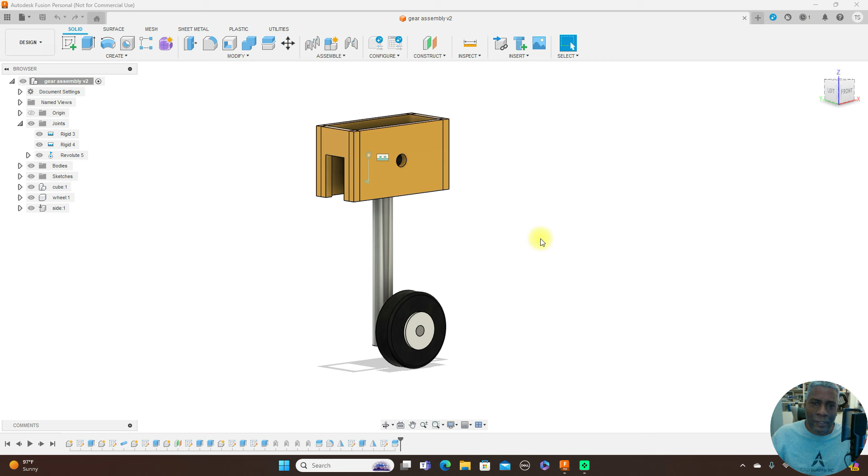Hello everyone and welcome back to the channel. Today we're going to be looking at doing a simple assembly like this landing gear here.

And then giving it motion also like this, you see it moving all in there.

Okay, let's go ahead and get started. Let me start a new project here. So I have a blank screen here. So the first thing you want to do, now this here, I'm going to do this in millimeter units, as you can see. So click this and this.

Then we come over here to assembly, and this is going to be a new component. I'm going to call this the cube. Click OK.

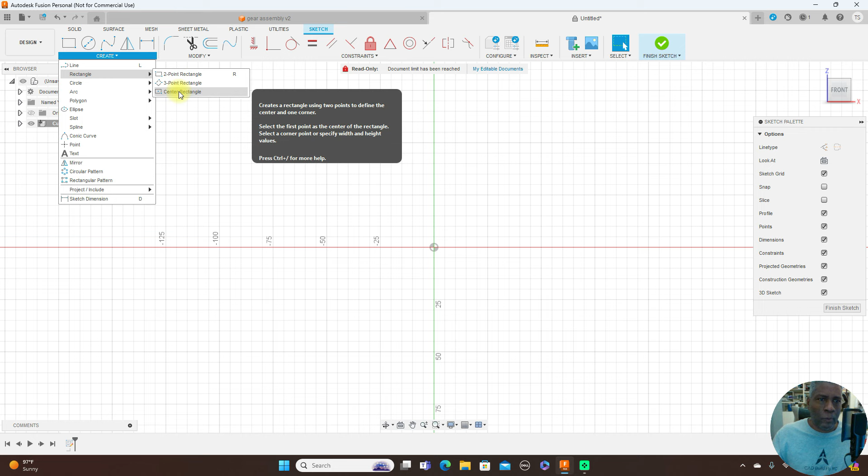Now create a sketch on front plane. Use a center point rectangle. Center here, and type in 40. Then hit Tab, and type in 40 again. And hit Enter.

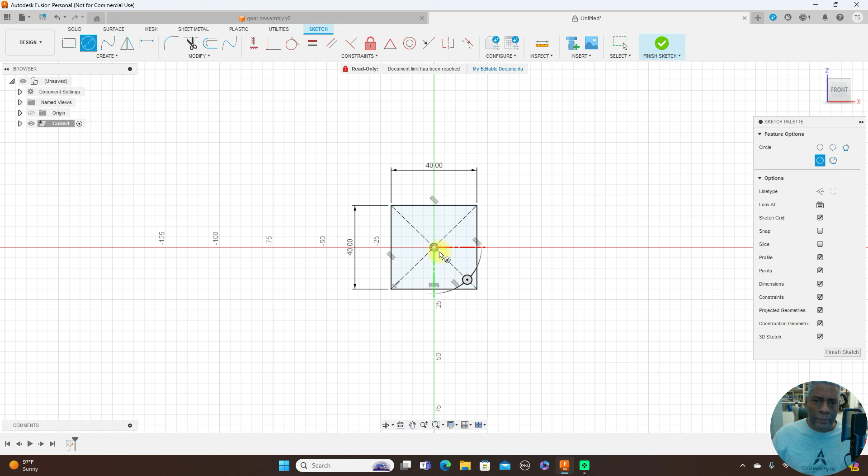Now use a center diameter circle. Center here, and change this to 8 millimeters. Click OK. Go ahead and finish sketch.

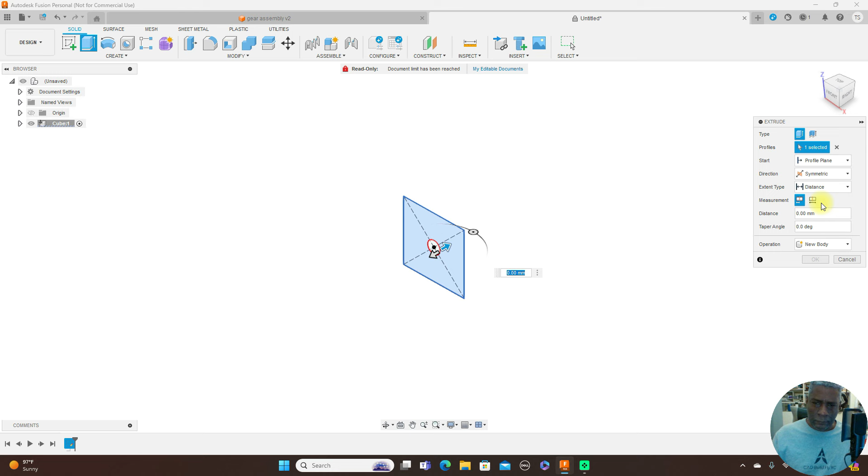Now we're going to extrude, letter E. Select this and change this one side to symmetric and type in 15. Click OK.

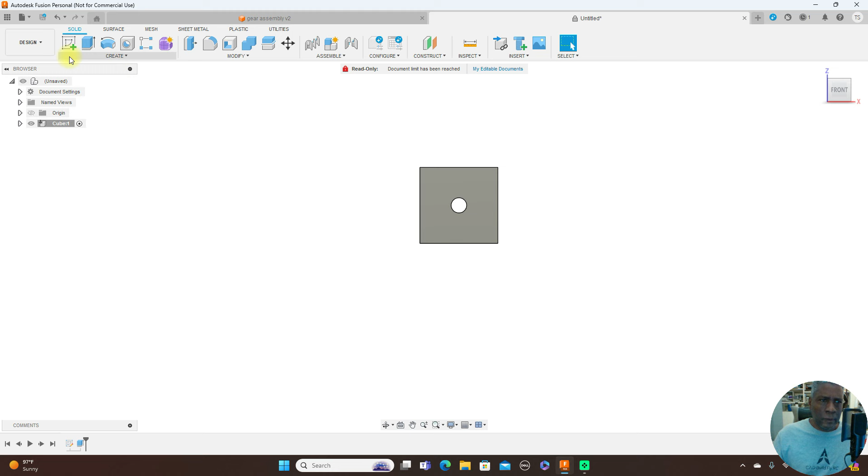And this is the first component, the cube. Now we're going to do that landing gear shaft. So come over here and save, click this. Then assembly, a new component, and we call this the shaft. Click OK.

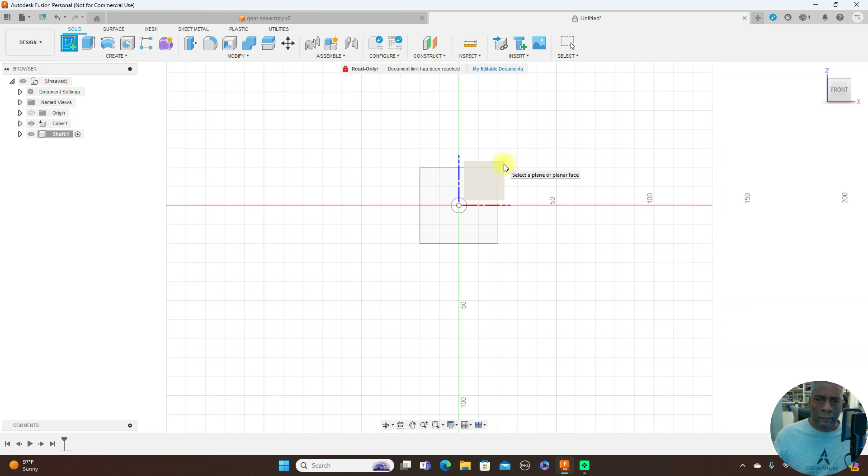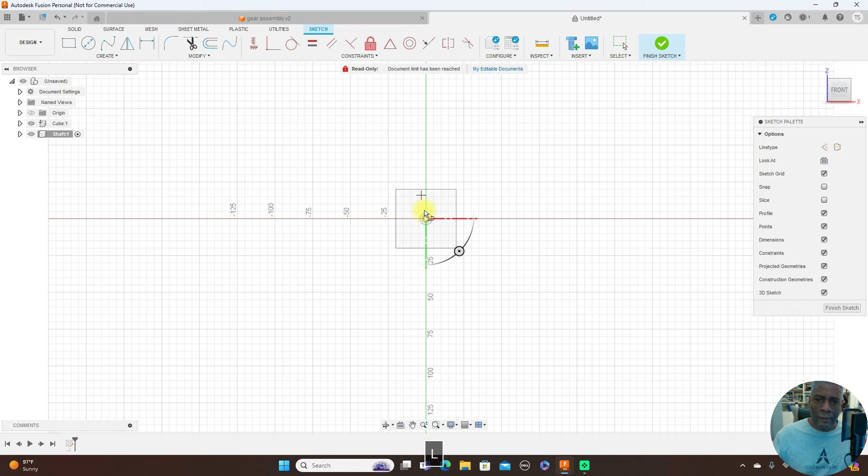Now we're going to create a sketch on this plane here, and we're going to use the line tool, L for line. Snap it here, and move this down and type in 120. And OK. Oops, forgot to - type in 120. And OK. There. All right, go ahead and finish sketch.

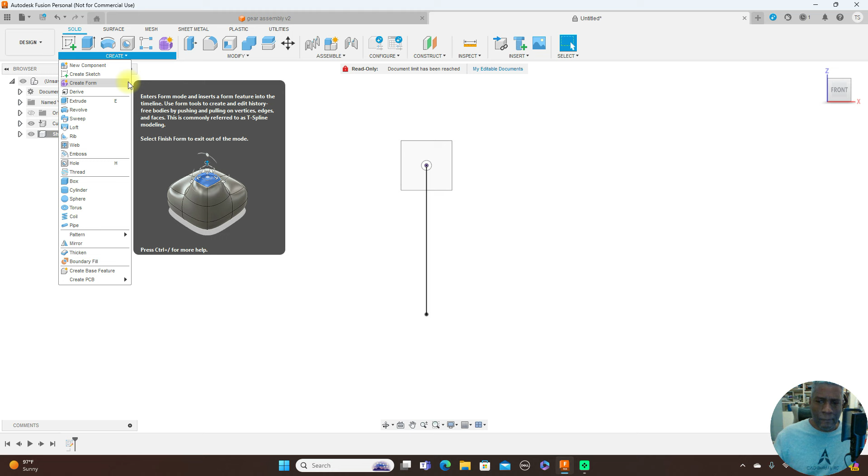Now come up here to create, come down to the pipe command. Select this line and type in 10 millimeters. Click OK. And that's the second component.

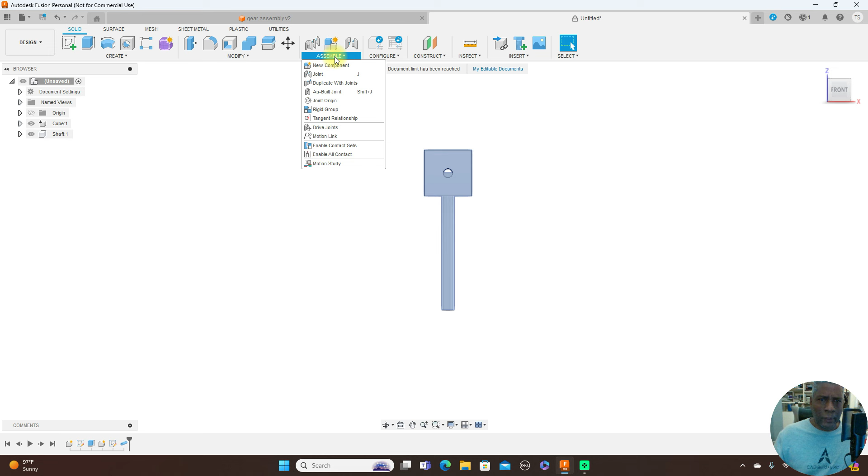Next, come up there and save again. Click this. Assembly, new component. I'm going to name this the axle. And click OK.

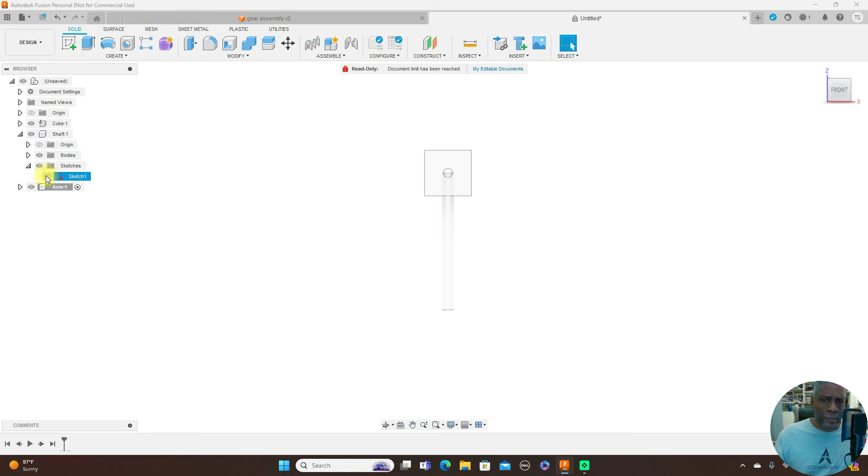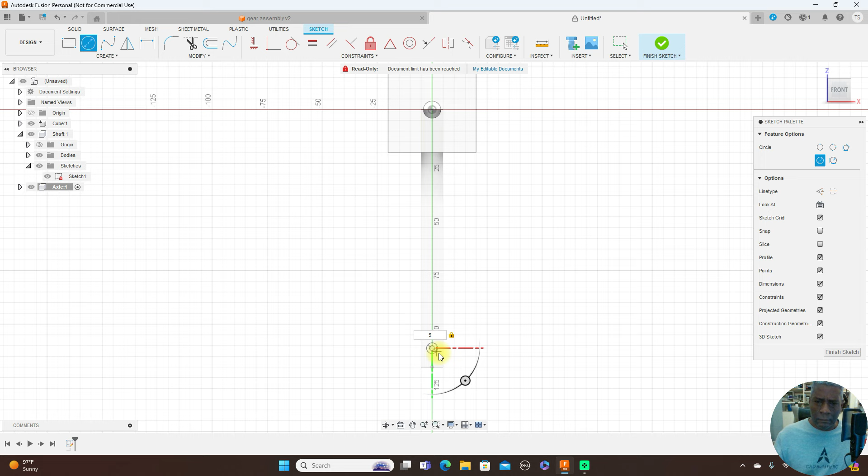Now come back up to this sketch here, shaft, and sketches, and turn on the sketch. Now create a sketch on this plane back here. And we're going to use the center diameter circle, and this is going to be 5 millimeters, so type in 5. OK.

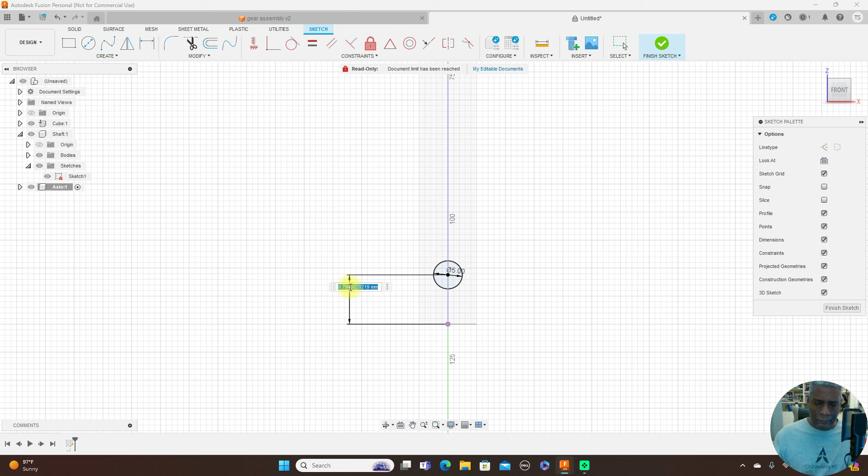Now give this a sketch dimension at 8 - I'm sorry, 9. Hit enter. And go ahead and finish sketch.

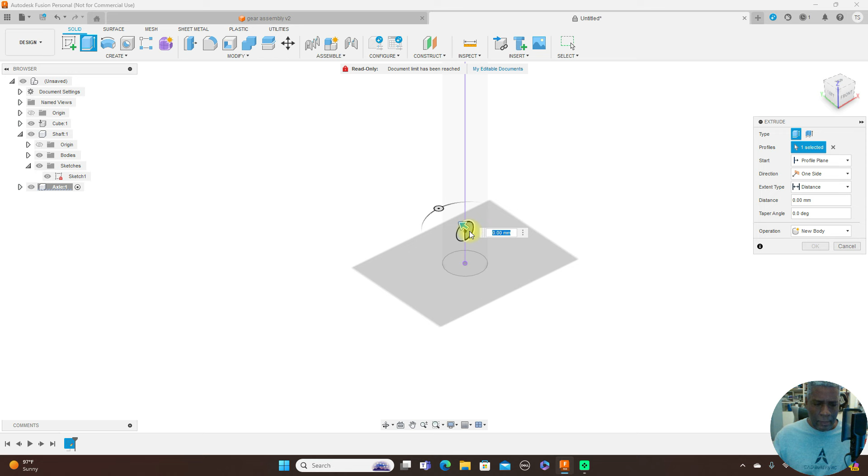The letter E for extrude. This side and this one, and move this out to 30, negative 30, and click OK. And that's the axle.

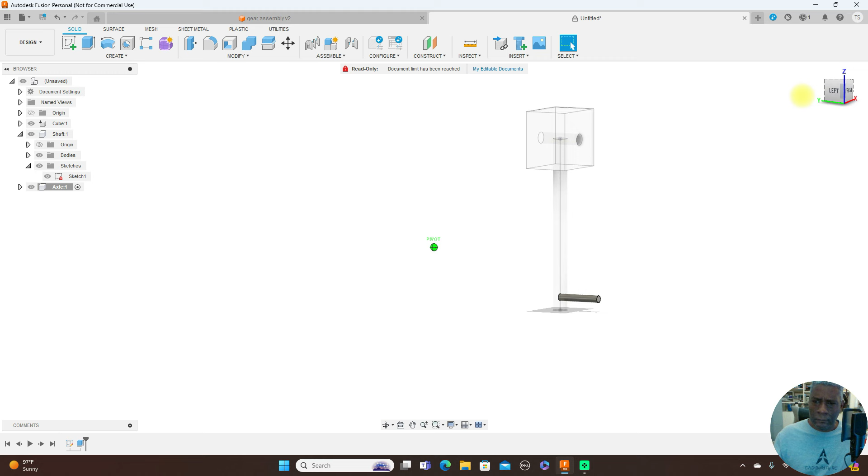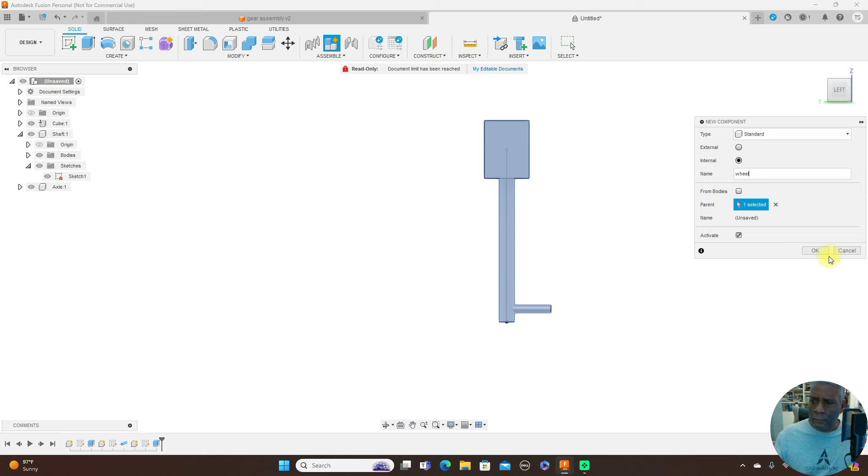Next, come up there and save, click this. And the next component we're going to make, come up to assembly, new component, and we're going to call this the wheel. Click OK.

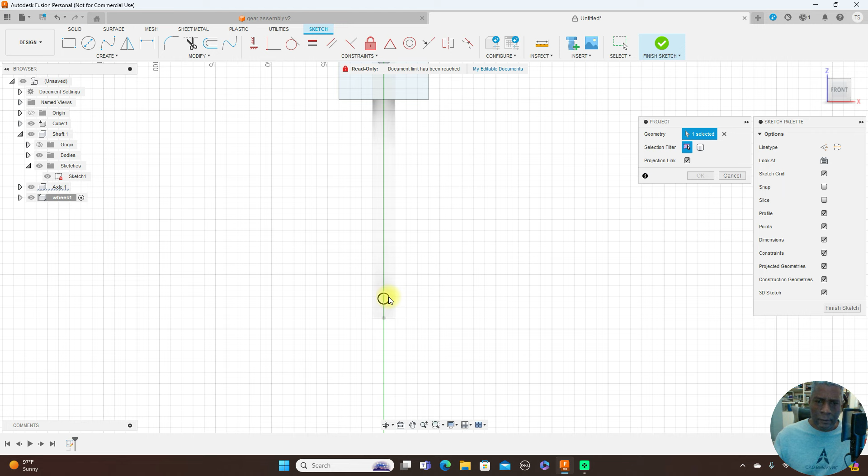Create a sketch on this plane. P for project, and we want to project this. Click OK.

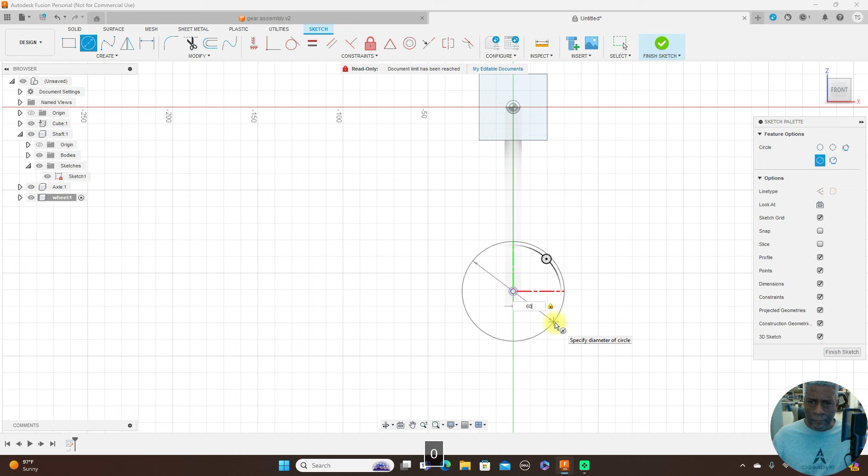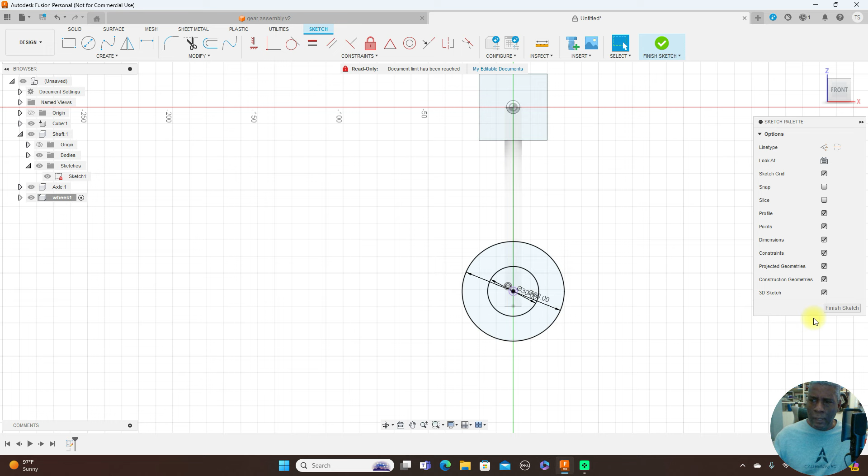Come over here to the center circle diameter. Snap it here, drag this out, and this is going to be 60. Click OK. Another circle, and this is 30. Click OK. And go ahead and finish sketch.

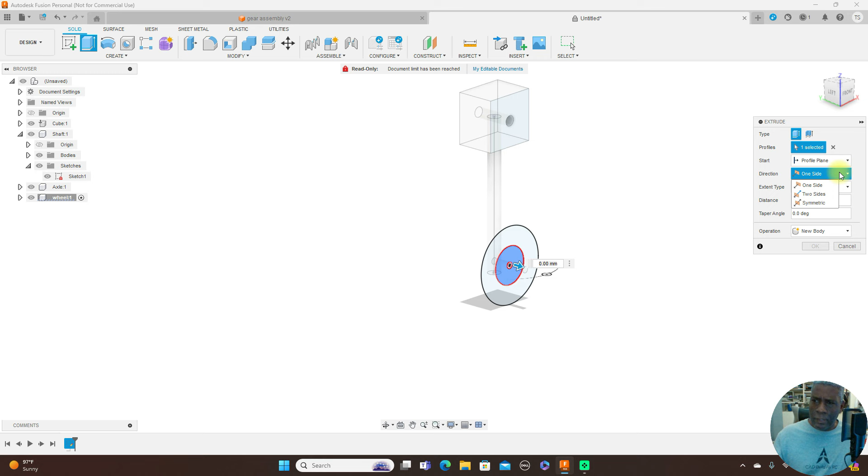Letter E for extrude. Now this was selected already, so just click this X, and we're going to extrude this. Change this to symmetric, and this is going to be 5. And click OK.

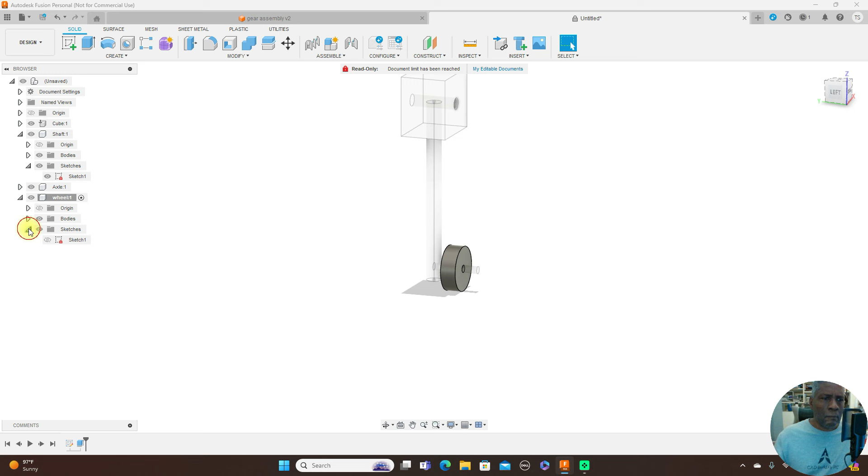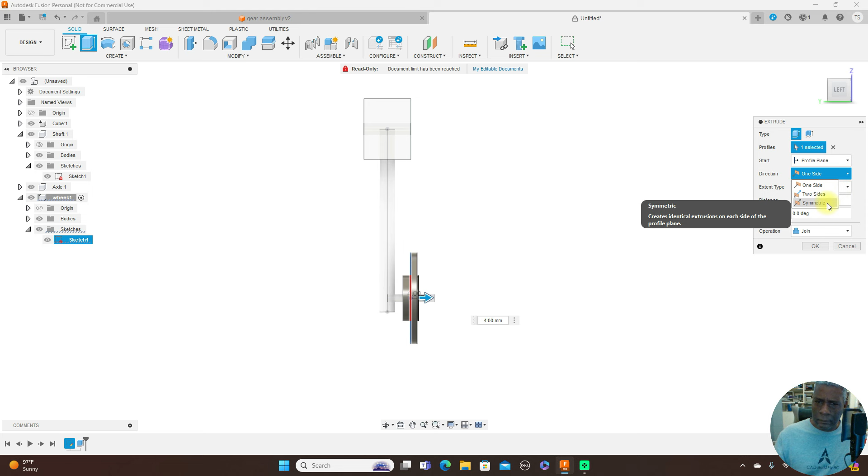Now come over here to wheel, sketches, and turn the sketch back on. Extrude, select this. Change this to symmetric. And click OK.

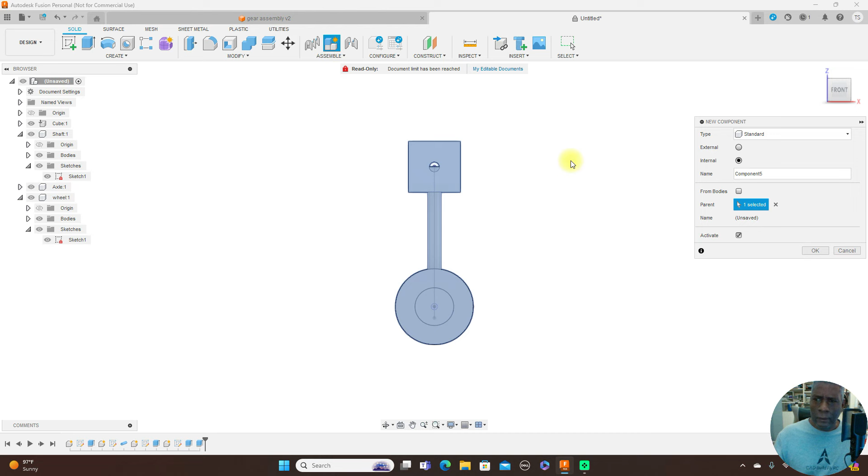The next component we're going to make here is the side. So come over here again, assemble, new component. Change this to side, name of it is the side. Click OK.

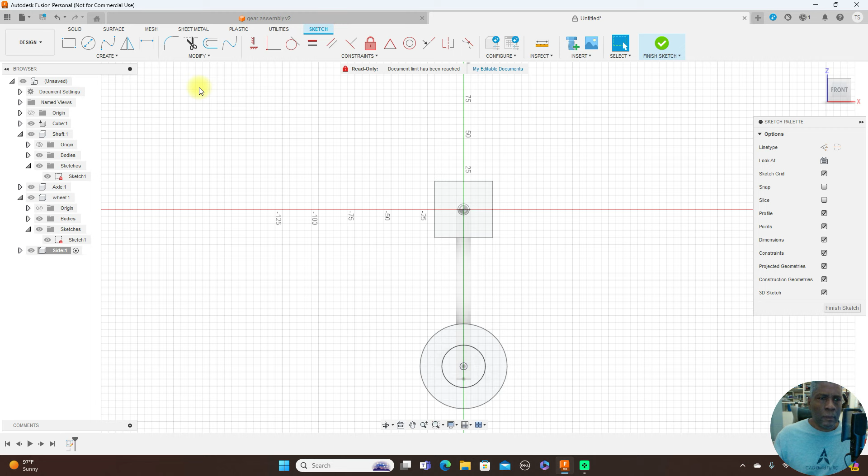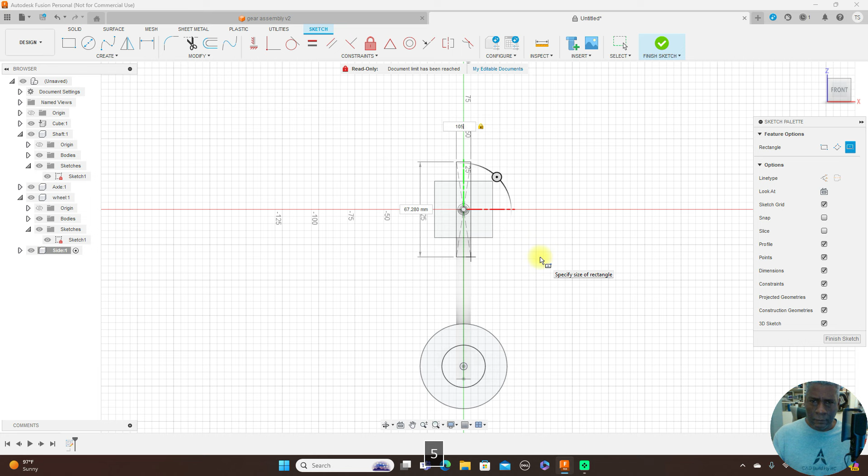And we're going to create a sketch on this plane here. Come here to create, rectangle, center rectangle, snap it here. And this is going to be 105 by 55. So hit Tab. And click OK. Go ahead and finish sketch.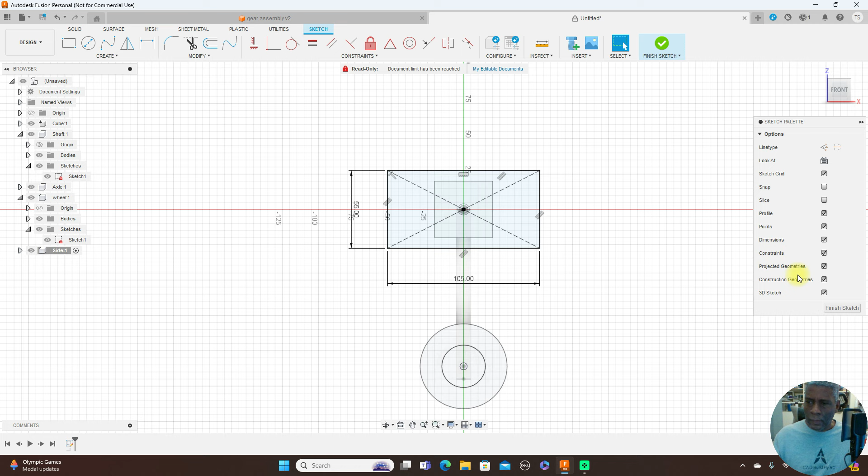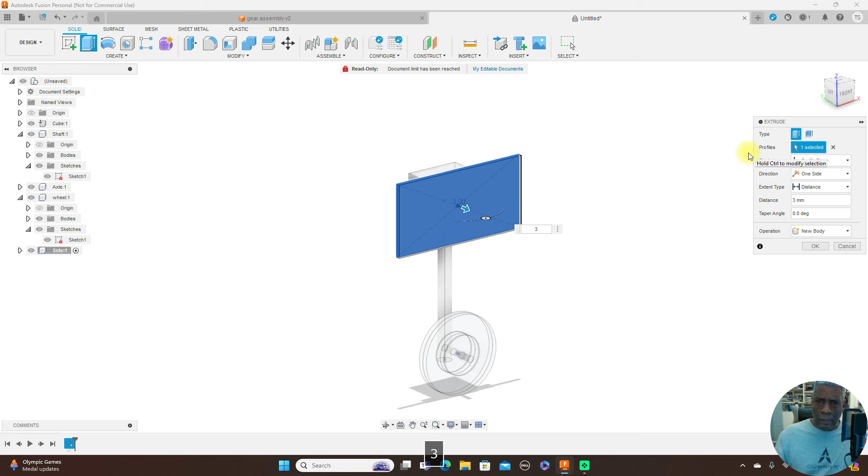Letter E for extrude. Select this plane here, the profiles. Select that. 3 millimeters, and click OK. Okay.

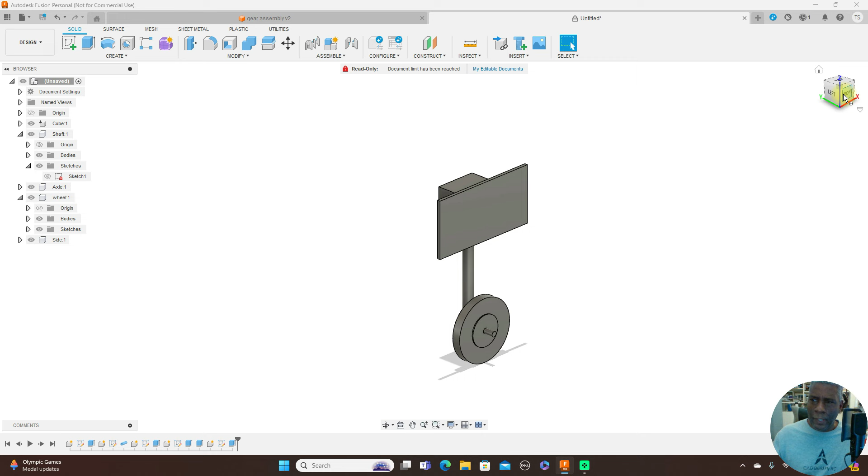And this is what we have so far. Now these move, this does not. So select this, revert position - this moves everything back to what it was before.

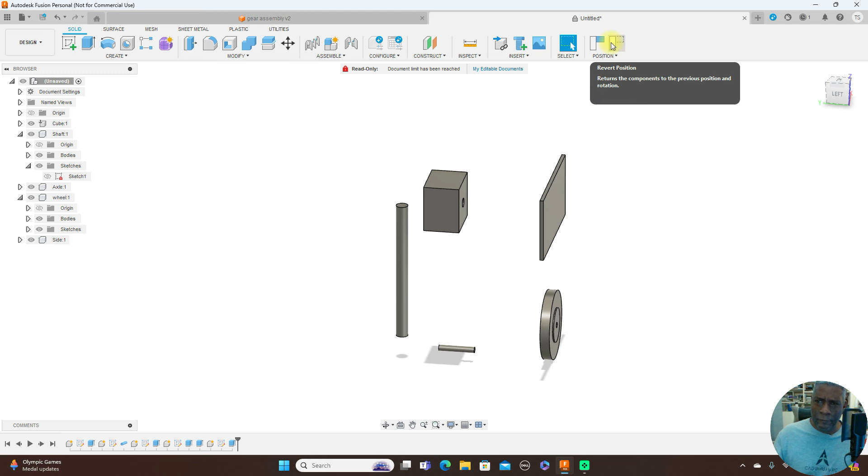Now this doesn't move this cube. So what we have to do is come over here to cube and unground from parent. Now the cube moves. Now move everything back.

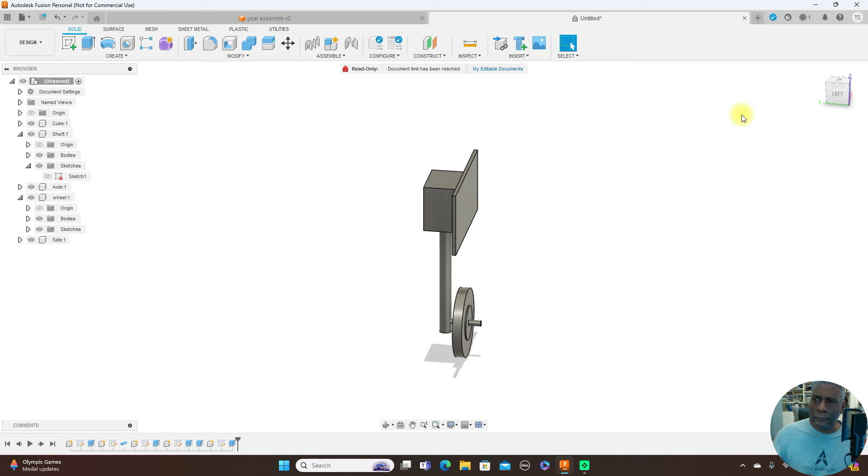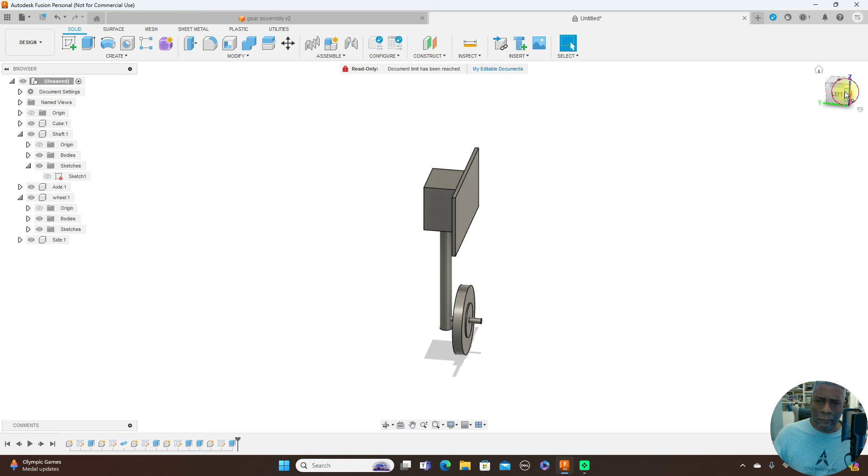First thing we want to do is come up here to assembly, click as built joint. Excuse me, cancel this. Okay, we need this side here, sorry about that. We need to ground that side so it doesn't move, and now it won't move. Okay, but all the other components will move.

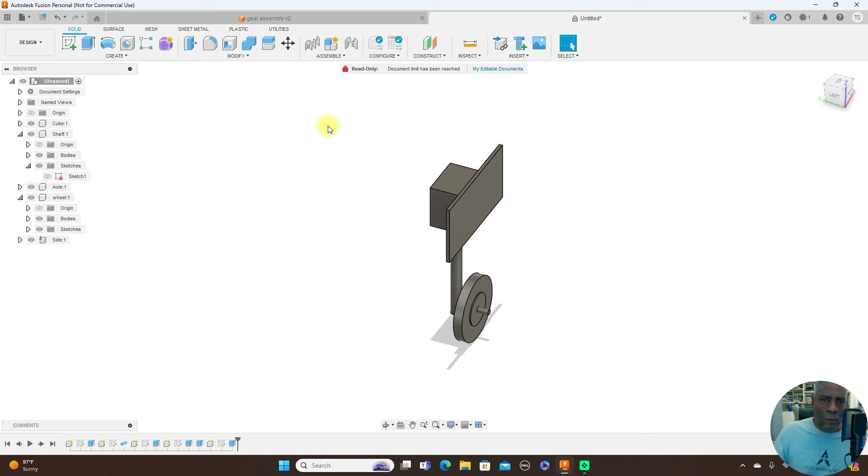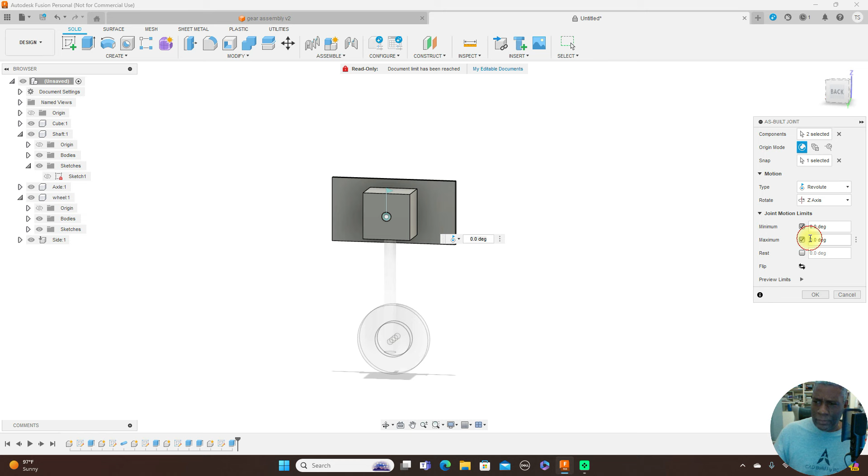Now come over here to assembly, click as built joint. Select this and this and change this to Revolute. Now select the snap for it, this - and it's moving in the correct direction. Now here the maximum, I only want this to move 90 degrees, so we type in 90. So it's only going to come up this way 90 degrees. And click OK.

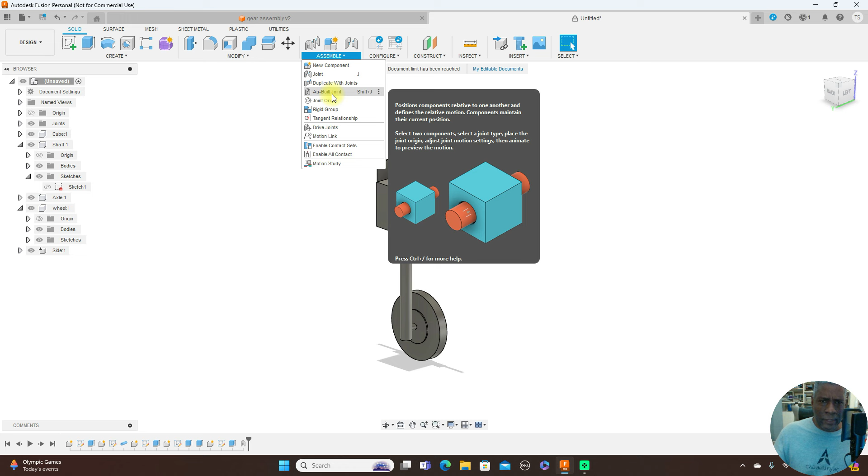Now what we do, we come up here to assemble again, as built joint. Select the cube, this. And change this to rigid - want both of those to be together, moving as one. So I'll make it rigid and click OK.

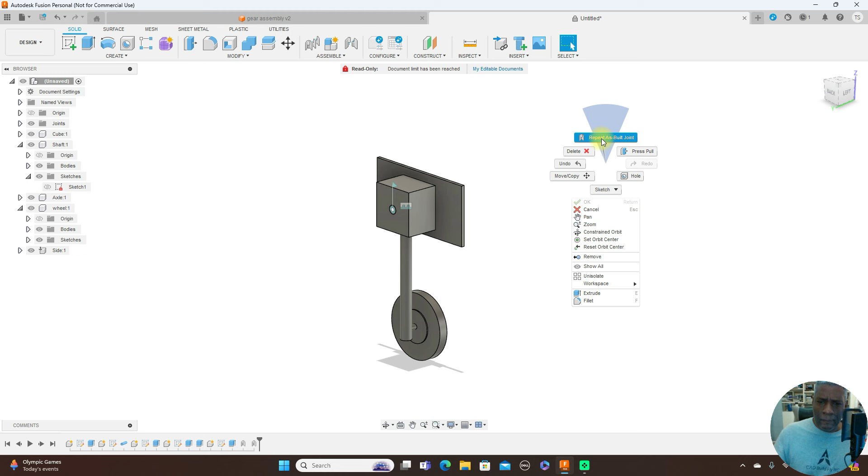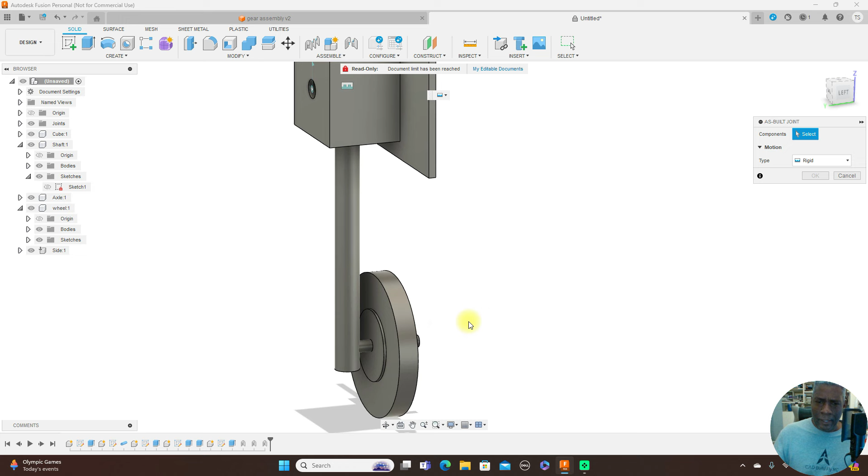Right click, same thing, repeat as built joint. Select the shaft and the axle. Rigid here, click OK. Right click again, repeat - this time we want to select the axle and the wheel. Make sure this is rigid. Click OK.

And this is what we have. Let's see, does it move like it should? Click on Joints, Revolute, right click, click Animate Joint Relationships. And it's moving like it should.

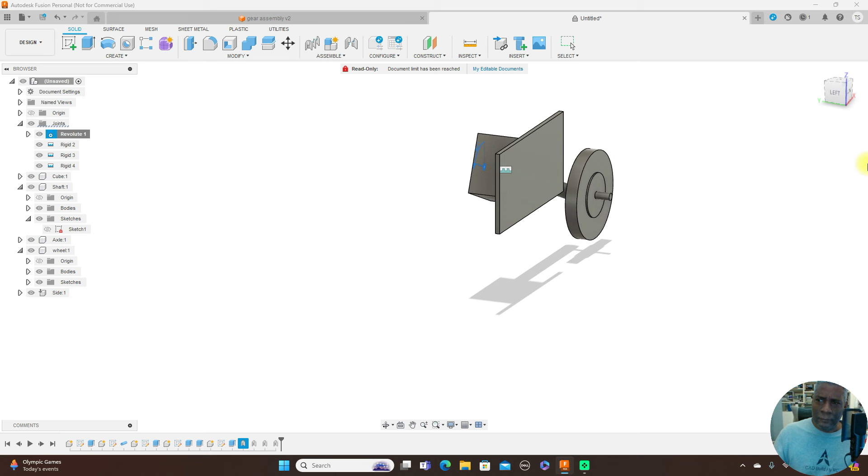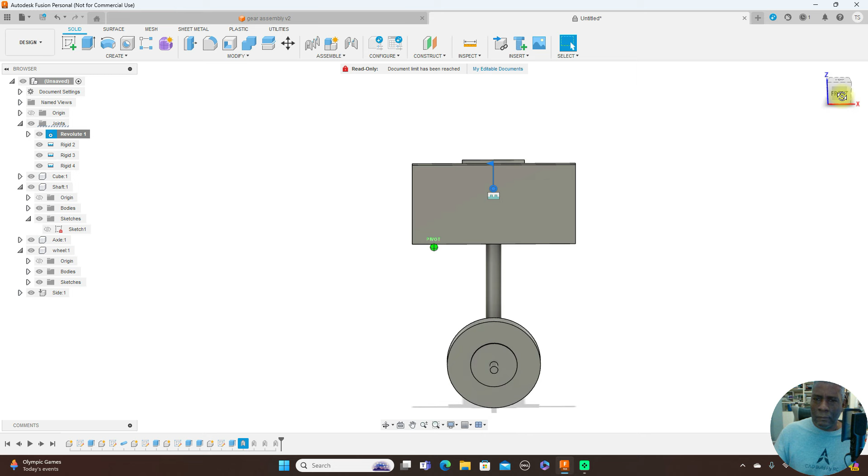Okay, now to stop the movement, just hit ESC. Okay. Now, come up here to create a mirror. This side here, mirror plane is this, new body, click OK.

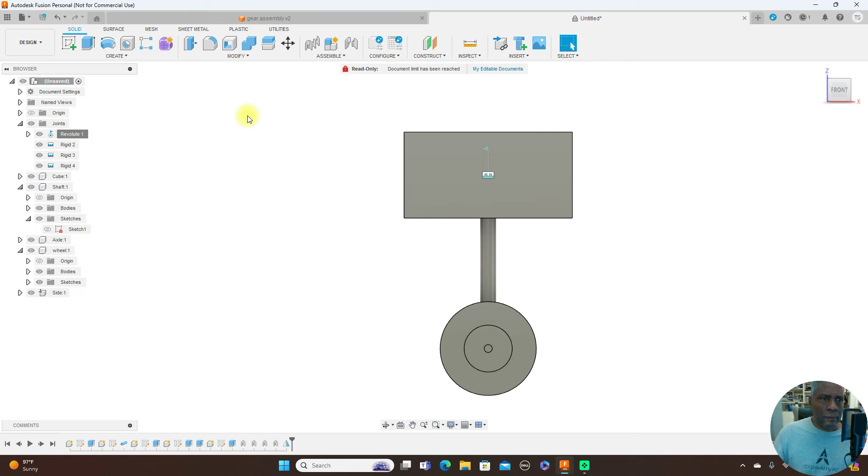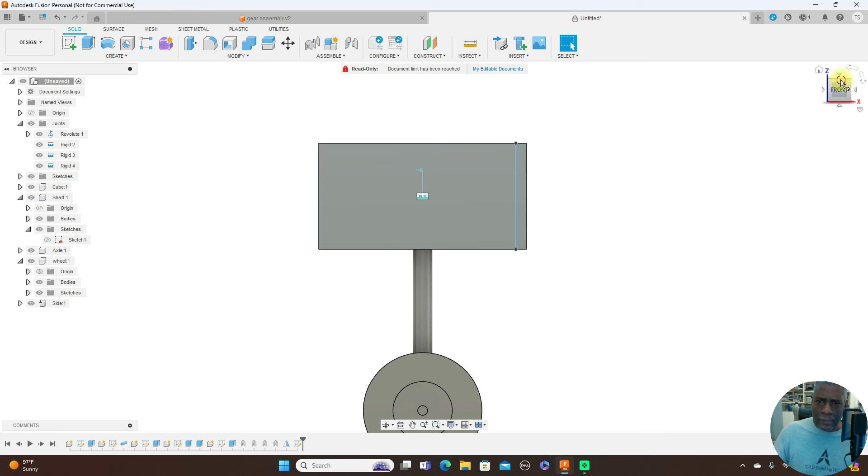Create a sketch on this plane here. L for line. Now you could have drawn this box all around in the beginning, but I just decided not to. I just wanted to do something very simple, so you guys could get the movement going and everything to see how it all works.

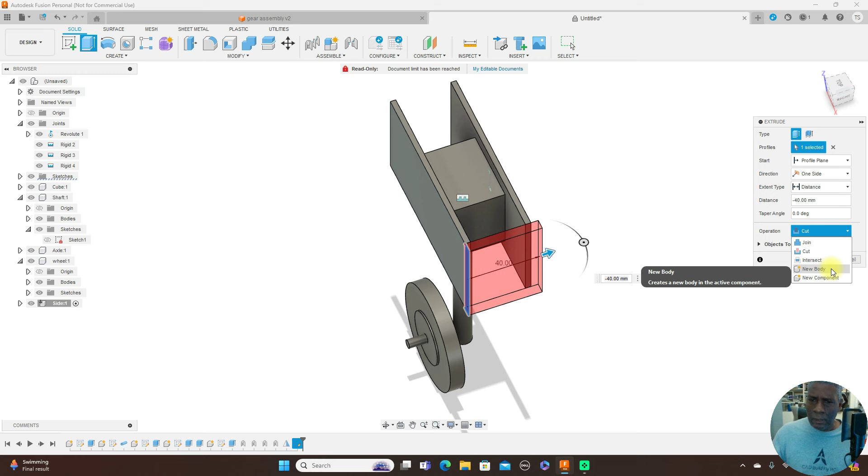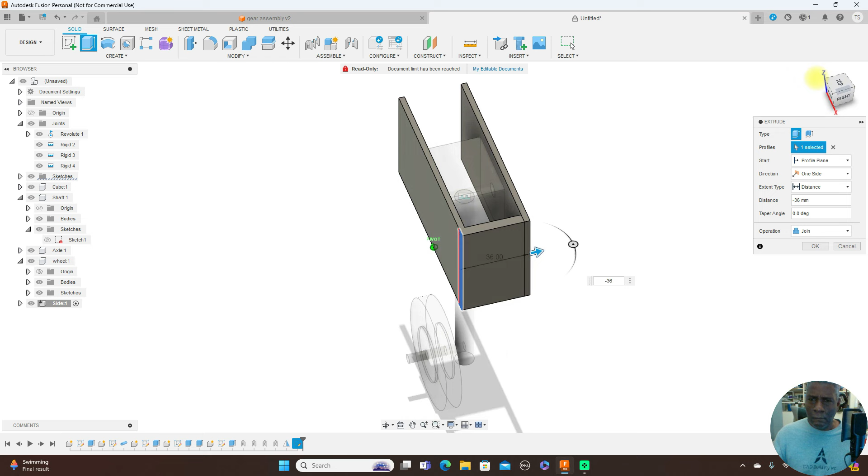And now letter E for extrude. I want to extrude this over here. Set this to join. Okay. Click OK.

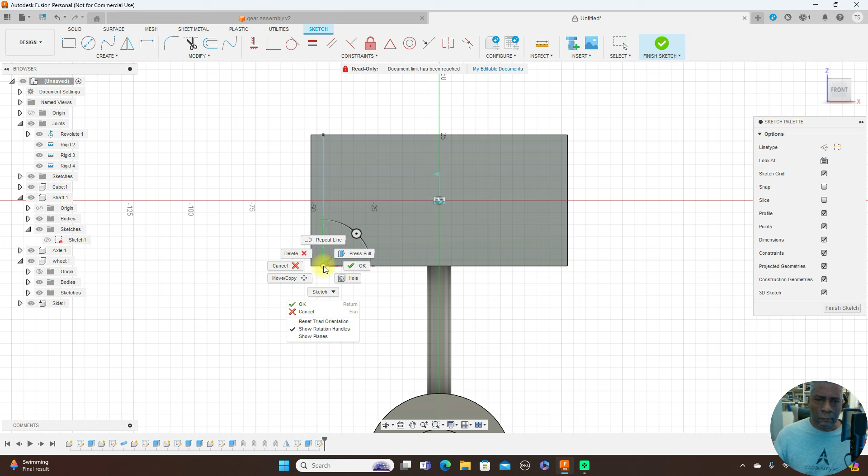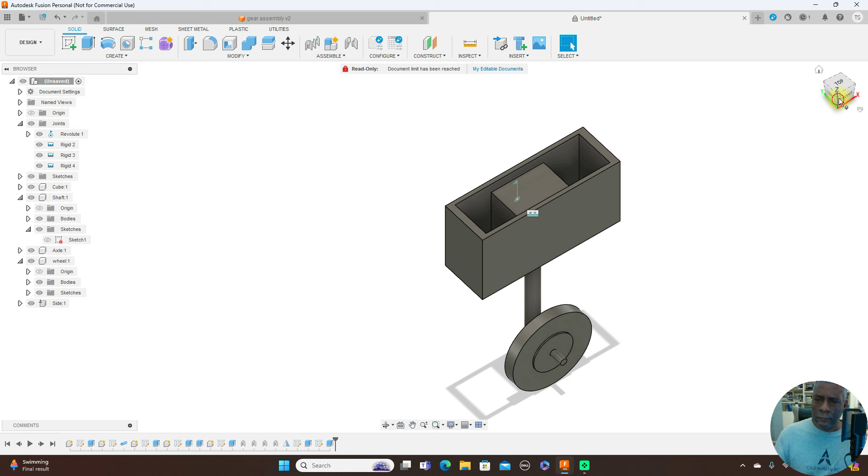And same thing on the other side here. Create sketch on this plane. Finish. E for extrude. And join. And click OK. And there you have that. And again, joint relationships. Now, as you can see, it goes up through there.

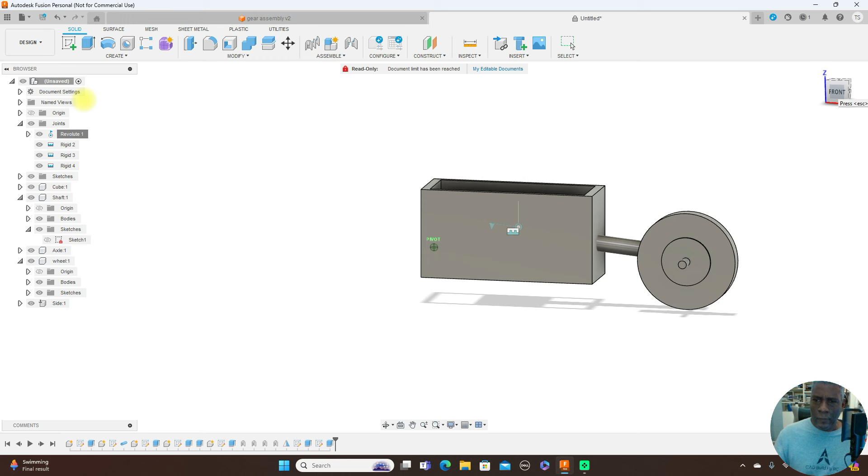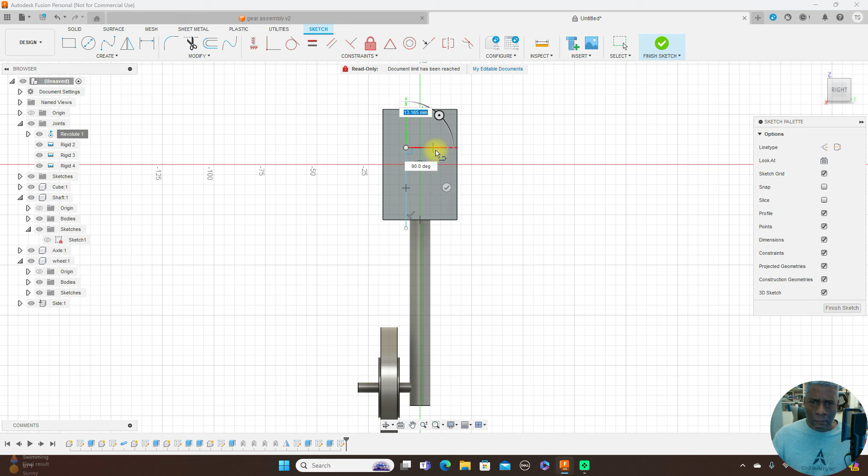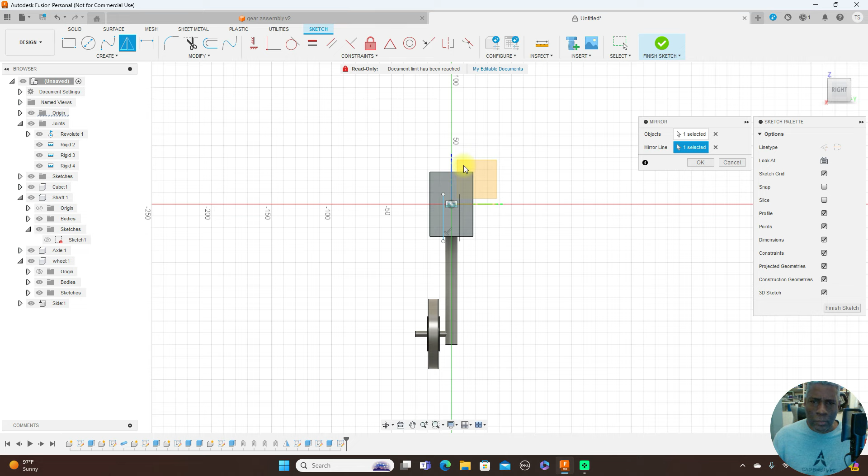So what we need to do to make this look more realistic, cut out an opening back here. So stop that. Create a sketch on this plane here. Use a mirror. That. Turn the origin back on so I could use it. And click OK.

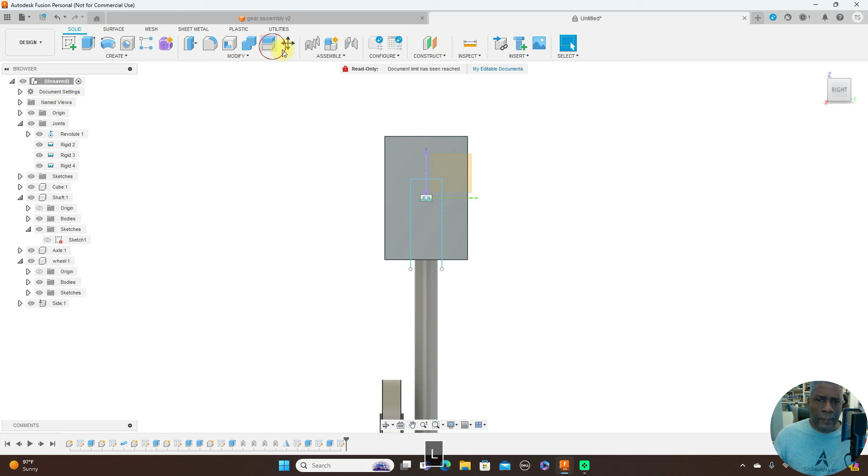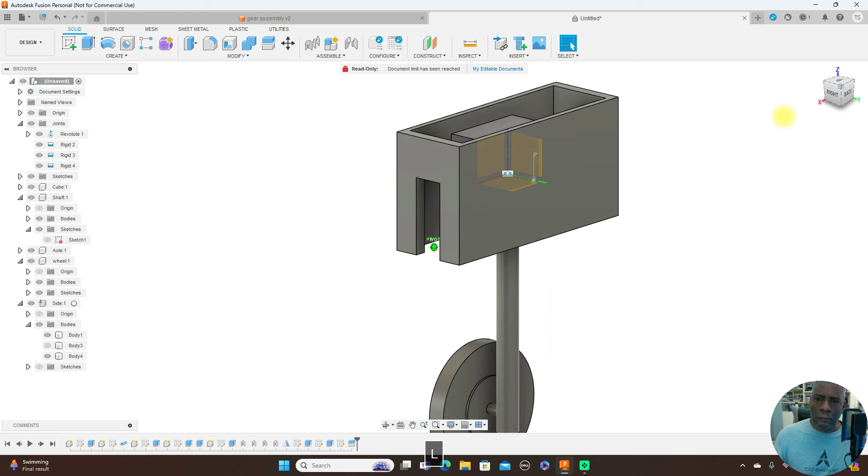Now, L for line, snap here, and snap here, click OK. Go ahead and finish sketch. Now we want the split body. This is the body to split, and this is the splitting tool. Click OK. Now this section right here. And there that is. And we have that. So now, let's check it out. And we have that.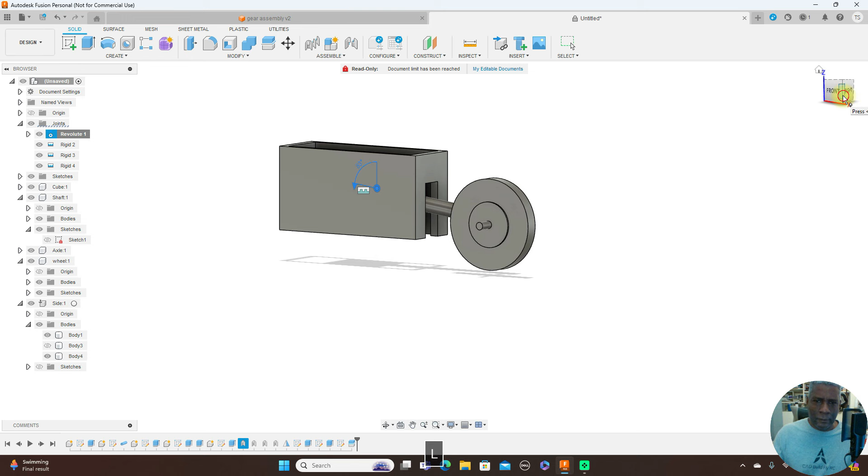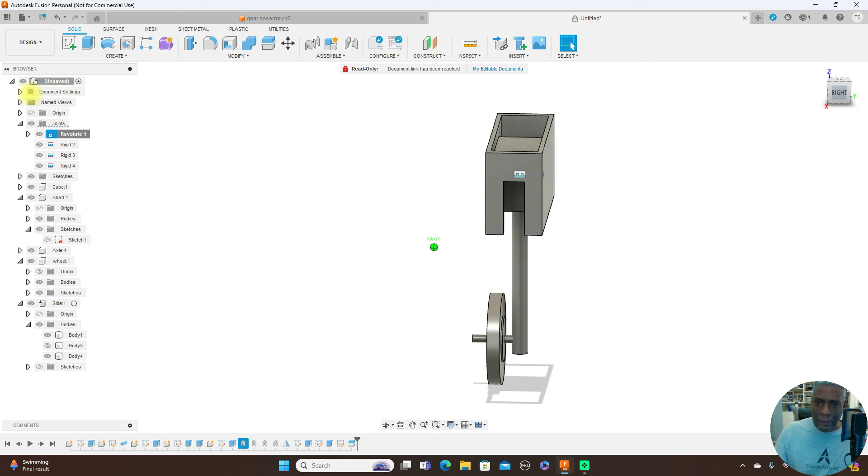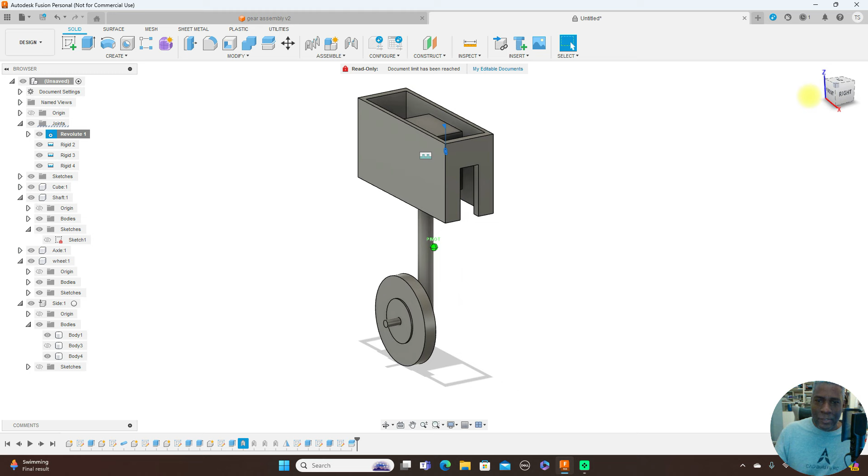Now, when I was learning how to do this, animation and stuff like this, and motion, I would spend hours and hours doing simple little things and try to get them to move. And there were always things out there that I could watch to learn how to do this, but they seemed like they were also complex. There was no simple little video out there like this to learn from. Everything seems so complex. And this here is just very simplistic, just moving one part like this. So yeah, I just wish there was something out there like this when I started learning how to use motion and all that kind of stuff.

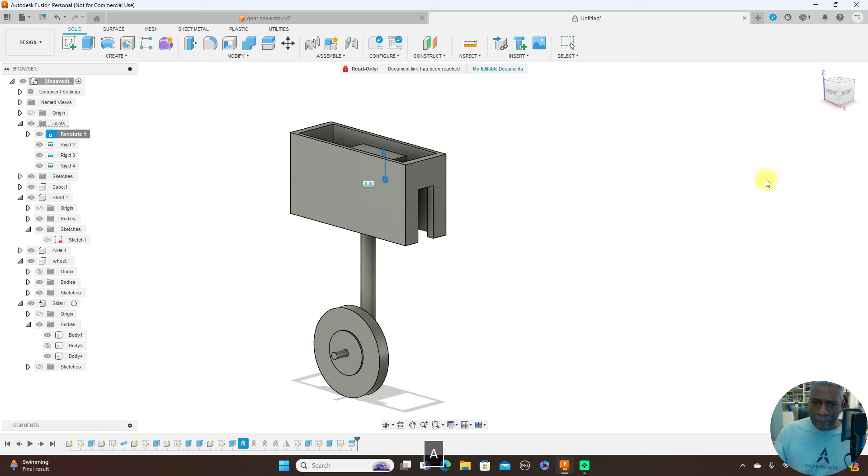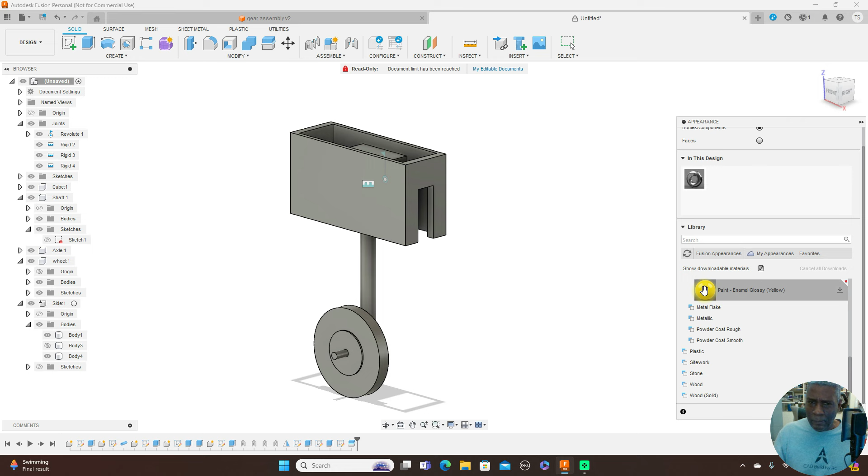Let's go ahead and give this some color now. So, letter A for appearance. So what color is the other one? Okay, it's yellow. So make this yellow. Let's go down here to paint, glossy, make this part yellow. Plastic. This part nylon here.

Go to, let's see. What other colors could I use? Something metal, but with some color. See what we have here in aluminum. I make this polished, no. Like this.

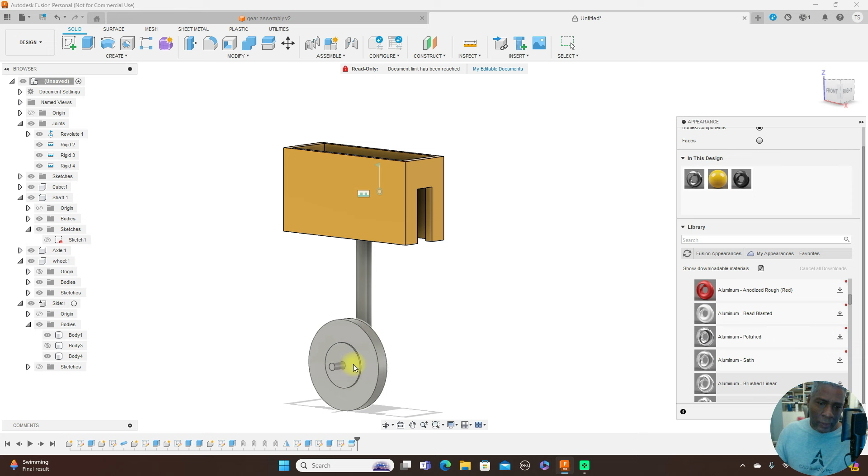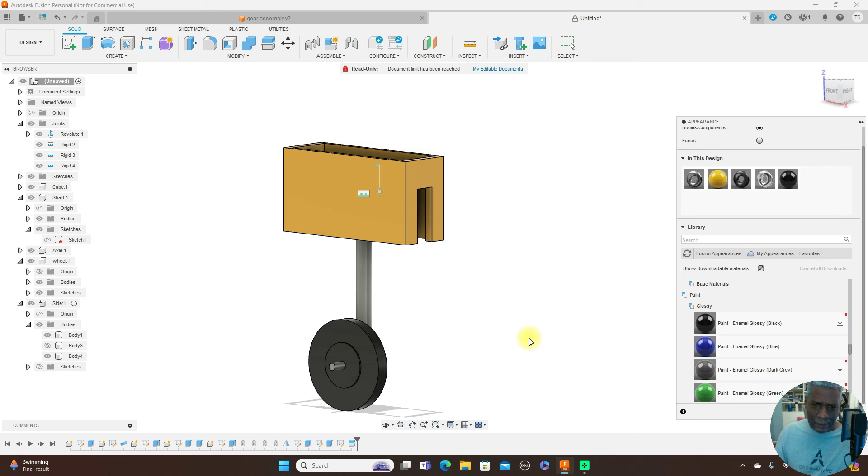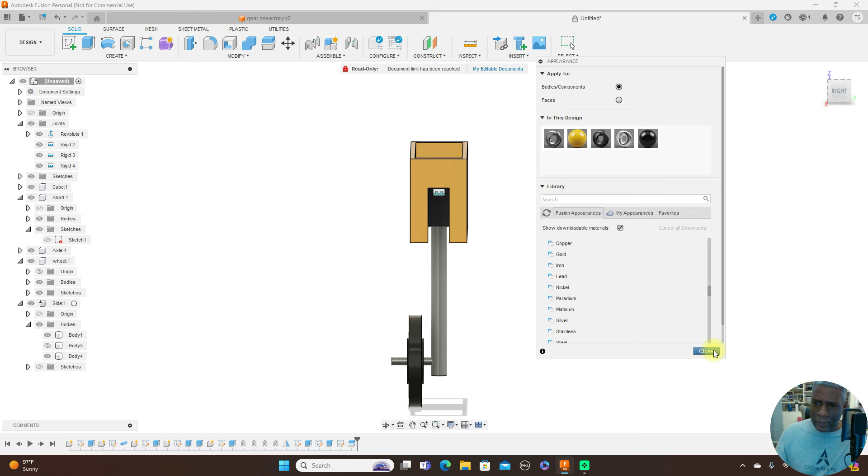Now, if you notice, the wheel here, when I extruded this, I should have made these two parts separate, but I used a join. So I can't make this one color and this one another color, because this is all one. So what I'm going to have to do, I don't like that, so make that black like that. And let's go ahead and leave that as is for now. Go ahead and close this. All right.

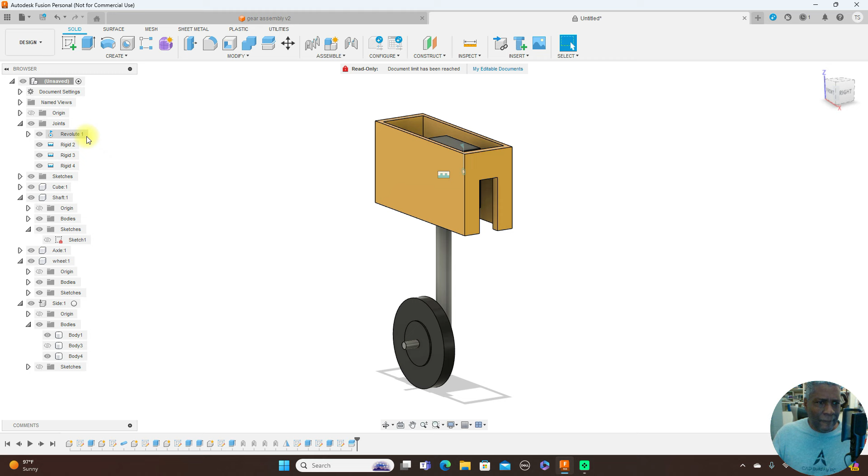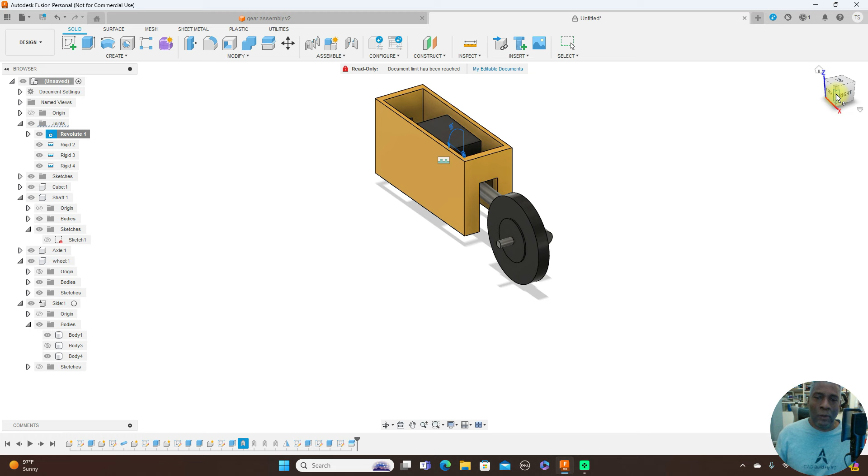But this is going to conclude this video here. And just keep playing around with this stuff until you get it. Things may not work right in the beginning, but just walk away from it for a couple of minutes and then come back to it and figure out what's going on. Because like I said, when I first started doing animation and simple stuff like this, a lot of times it didn't work right. So I sat down for hours upon hours working on this type of stuff and just getting simple motion. And like I said, I wish there was a video out there like this, just showing you very basic stuff to get motion.

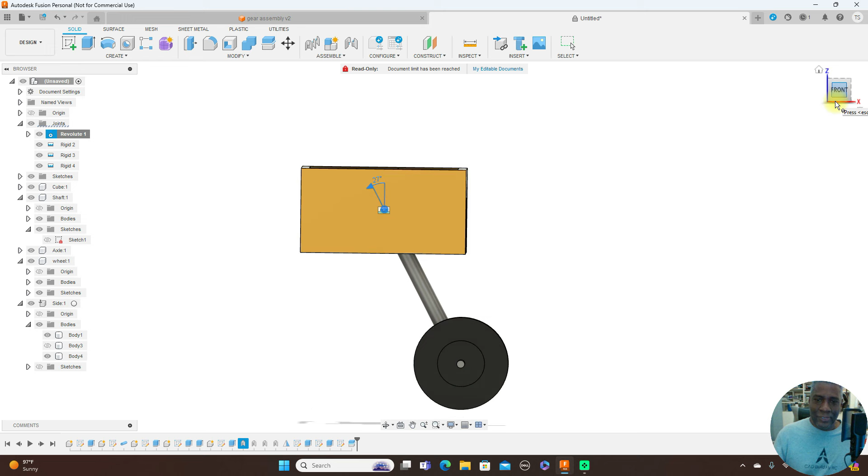And you can see, even though this looks really good, it was very simple to do. So, yeah. But anyway, so that's going to do it for this video.